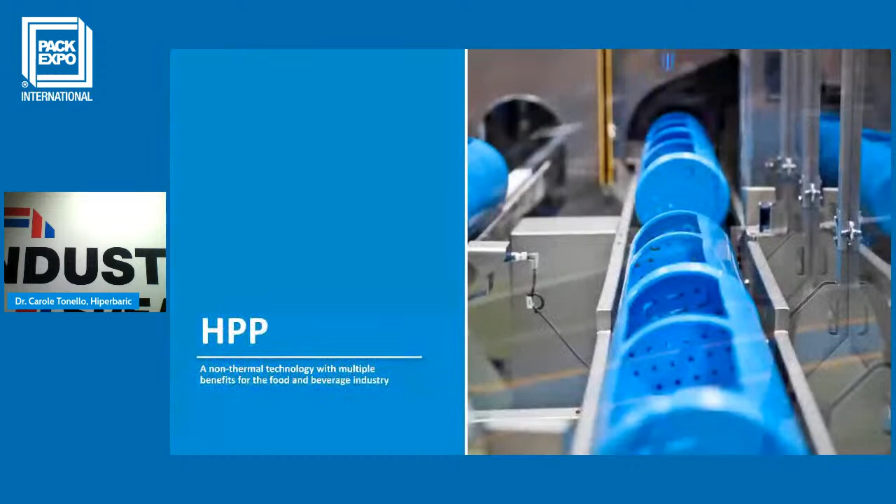First, I would like to introduce briefly my company. Hiperbaric is a Spanish company. We are the HPP world leader concerning machinery and high pressure processing equipment. The company has experience of over 20 years in the field, and we are based in Spain, where our machines are built. We have over 100 machines in the United States and 350 machines all over the world. This is really a global technology for premium products. How does HPP work?

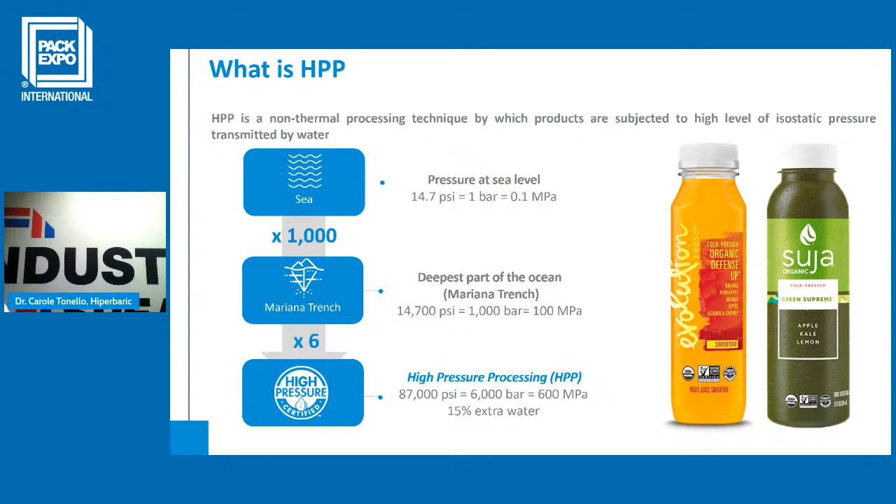Well, it's quite simple. It's like if you would place the products 60 kilometers below the water, so the pressure is 6,000 bar or 87,000 psi. This is what we can reach in the vessel, in the processing chamber of the machine. What is the interest? Well, we kill microorganisms. So we don't use heat, we use pressure. The heat increase is very low because the water and the food is not very compressible. The compressibility of water is 15% at 87,000 psi, so it's not so much.

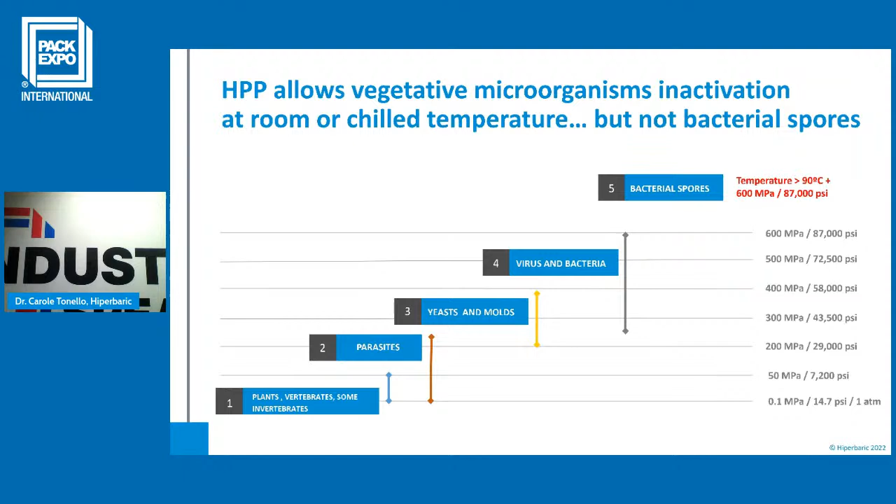We keep the products always under pressure, and always below room temperature. What are the advantages? We avoid heat treatments. We kill microorganisms, so we can reach between 3 to 5, 6 logs inactivation of pathogens. We multiply the shelf life from 3 times for ready-to-eat meals, for example, up to 30 times for juices. We can develop clean label products because we do not use heat, and you can remove chemical preservatives, reduce the salt, and have cleaner formulations.

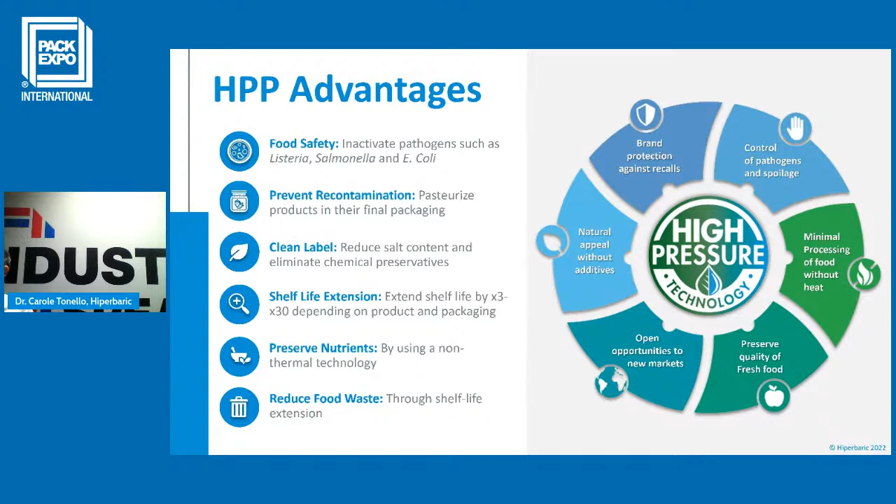This gives opportunity for enlarging the range where you can sell your products, you can export, and also you can ensure that the product is really safe for a long time. We know that there is more than 2,000 million kilos, so it's roughly 4,000 million pounds, processed under pressure each year.

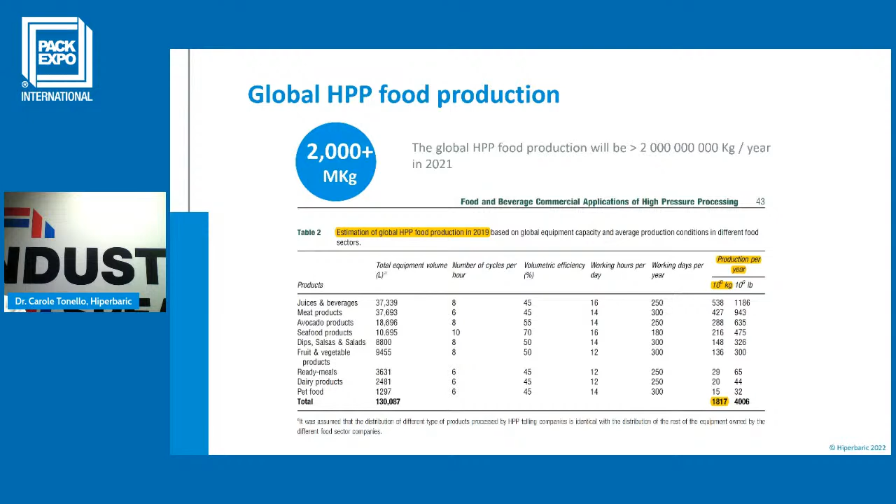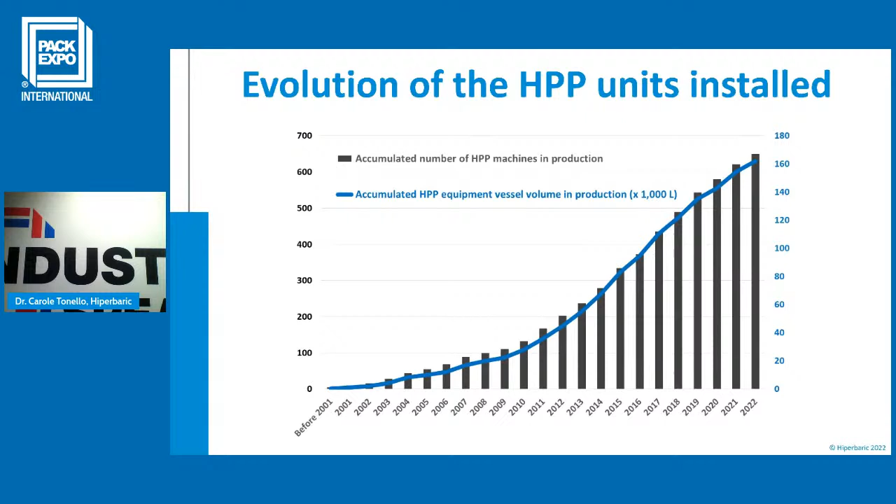This is the number of HPP units installed. As far as we know, there are more than 600 HPP units installed all over the world, and more than 100 are in the United States. This is a global technology. In North America, so United States, Canada, and Mexico, there's a bit less than half of the machines installed all over the world. This is because of food safety, and for Mexico, one of the main products processed under pressure is guacamole, avocado products. 24% of the machines are installed in Europe, and then there are some machines all over the world, as it is a growing market.

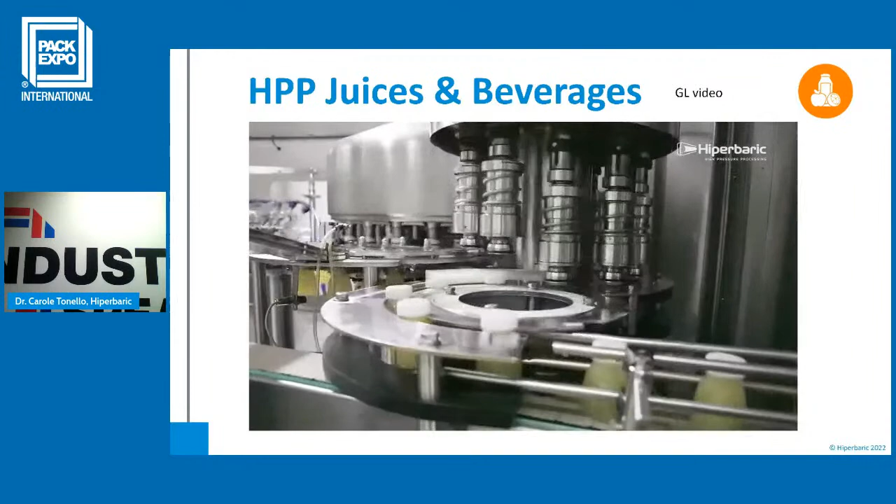A family, an 80-year-old family company. We are always driven by innovative, convenient, and natural products. So we wanted to have a long shelf life juice, but with the same flavor, with the same pricing. We were looking for technology, and we found this fantastic technology, which is HPP, high pressure process.

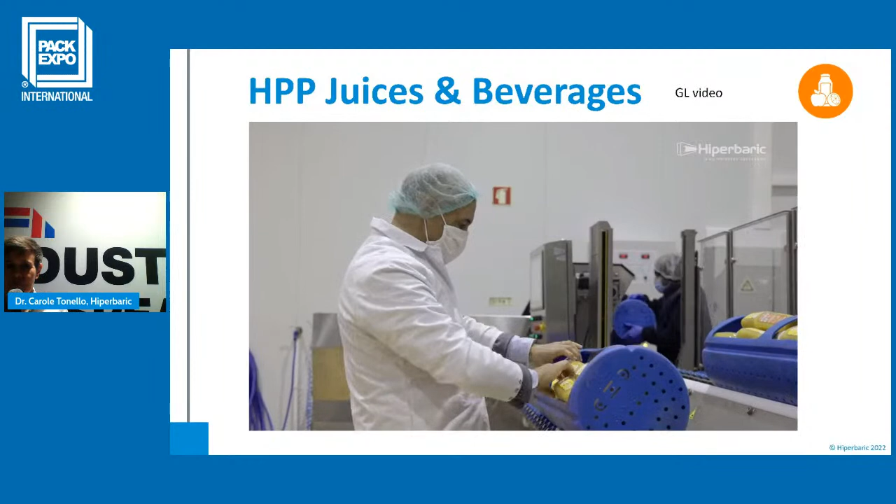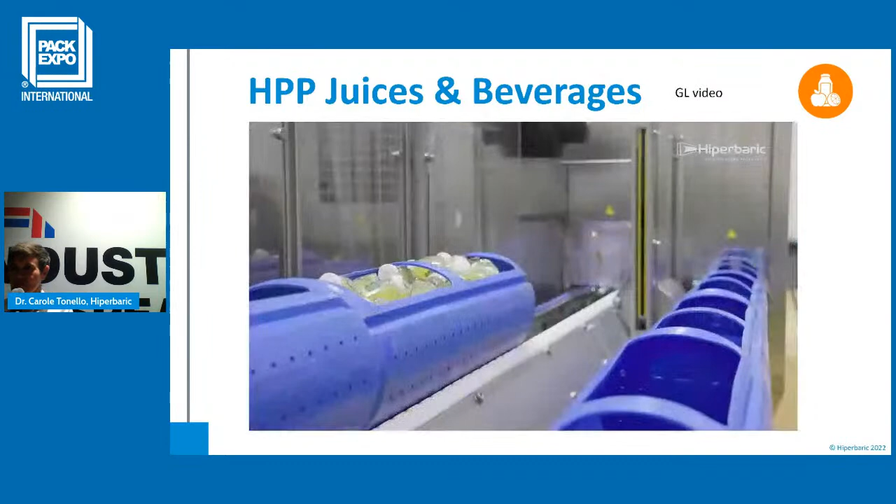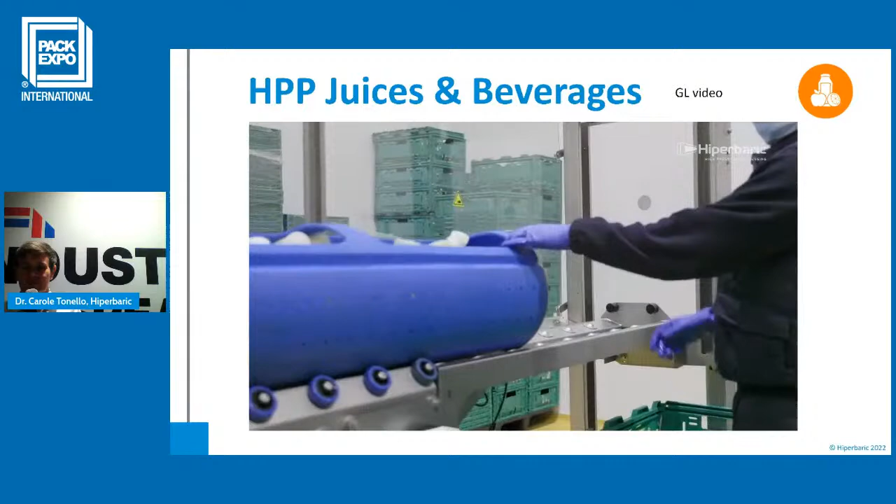And what we do is fill up the bottles with the juice. We close the bottles, put them in baskets, it goes into the machine, we increase the pressure, and this inactivates the pathogens inside. So it allows us to have a completely fresh product with the pathogens inactivated.

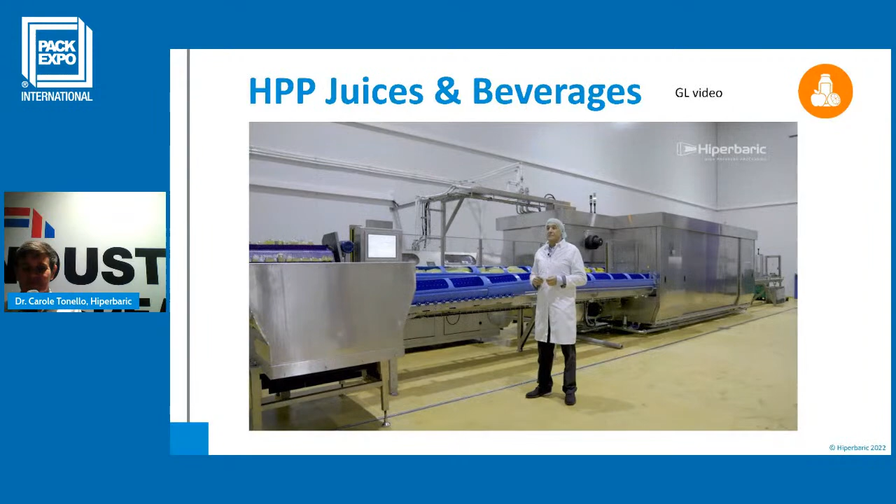Okay, that's it. So with high pressure in cold water, we get top quality products, clean label. So in simple words, we got fresher under pressure.

I have another video because I think videos are more interesting than what I can tell you. This is a customer called Freshcourt with Verfruco in Mexico, which is the main producer. Mexico is the country, the main producer of guacamole.

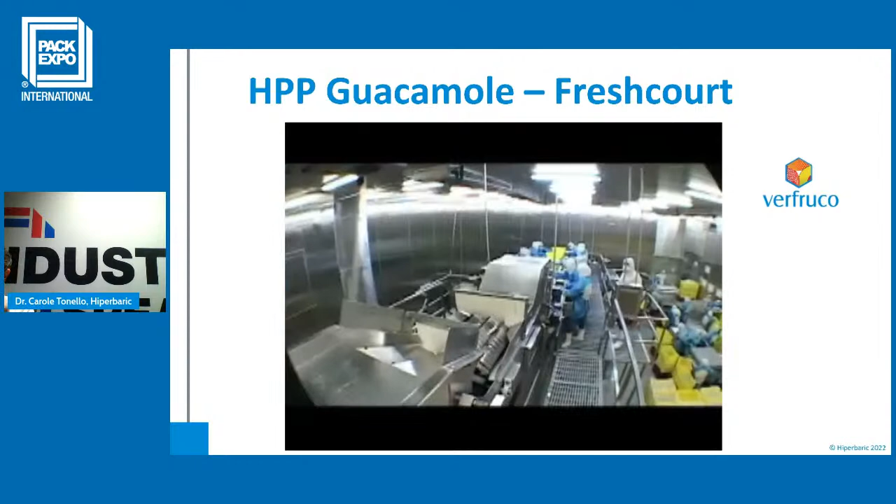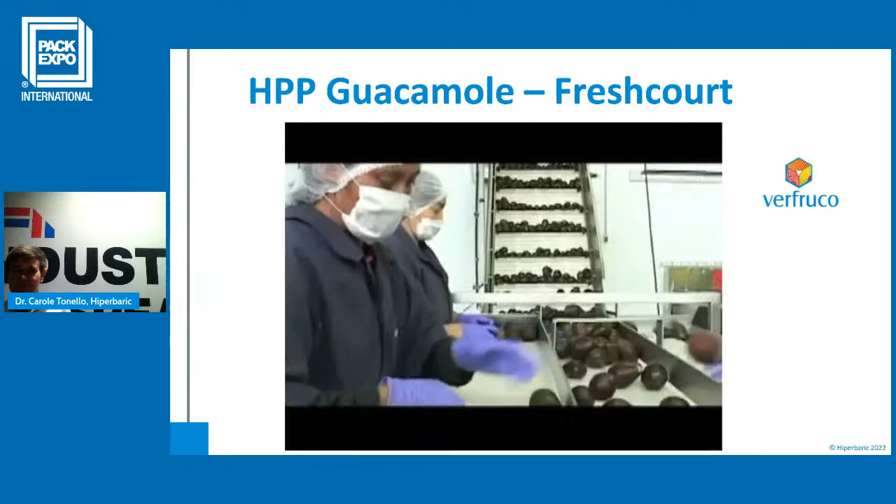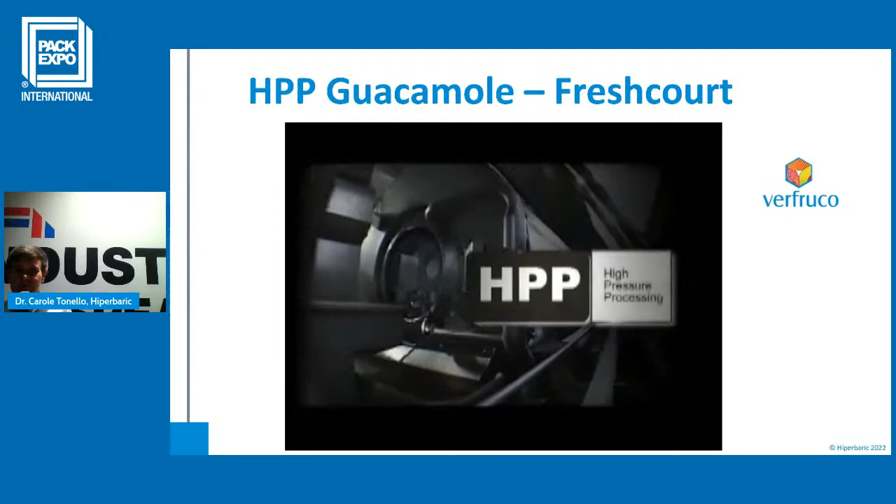This process allows us to deliver our products with the best flavor, texture, color, and ingredients.

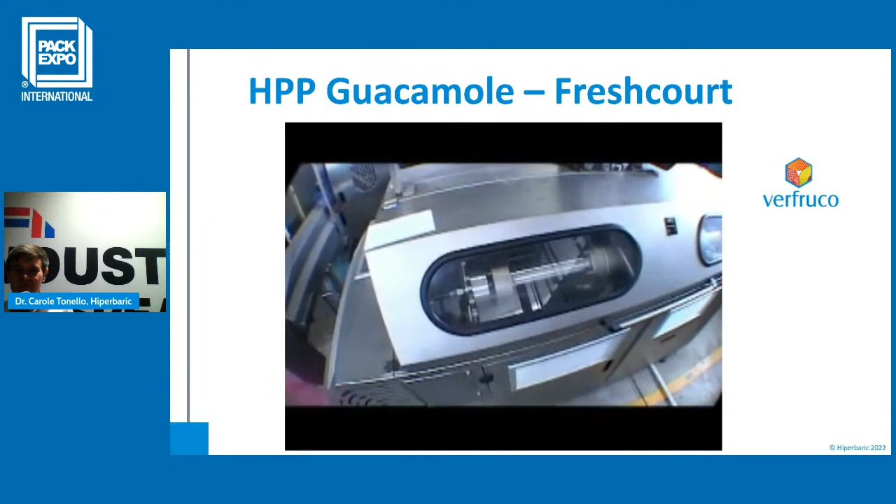In the case of guacamole or avocado paste, we go from, I would say, 2 days of shelf life and possibly a risk of contamination - because there is manual handling when you remove the meat from the fruit - up to 3 months shelf life. We also have another advantage: we partly inactivate the polyphenol oxidase, which is the enzyme that causes the browning of the fruit.

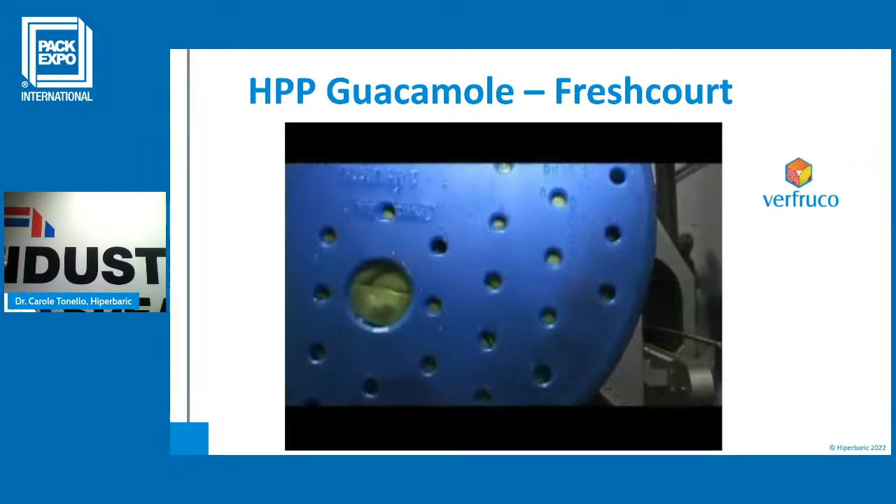Concerning meat products, we have a lot of applications in dry cured products like Serrano and Parma ham. This is typically a product you cannot process thermically, because when you cook it, it changes completely. HPP allows us to inactivate...

Listeria, especially Listeria and salmonella. We have some applications in raw marinated meats, but when the proteins go, we get a change of color and also a change of texture. So this is why this is more for minced meat and marinated meats. We also have a lot of uses in poultry products, like the poultry you place on top of a Caesar salad, and deli meats - because when you slice meat, you can contaminate each slice with the knife.

With HPP, you pack and then you process in the final packaging. So if there is any contamination with Listeria or other microorganisms, it's killed by the technology. We also have a lot of ready-made meats.

There is a quite new application which is pet food, because in this case the change of color for the animals is not very important. What they really like is the raw meat or raw meat mixture because it smells like meat, so it's important for the dog and the cat, and much healthier for them. If you have a pet, normally all their life they eat sterilized cans, so it's an over-processed product or dry product with quite reduced nutrient content.

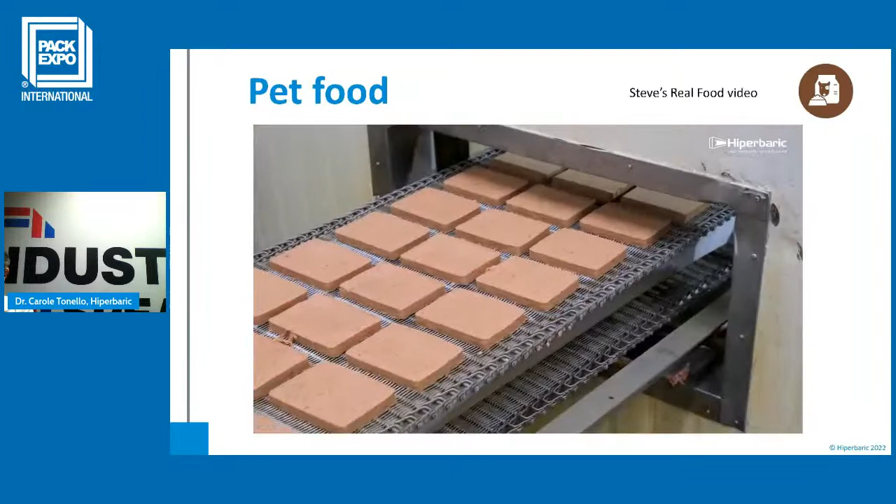Steve's uses HPP because we want to achieve a 5-log reduction. It is the only method that allows us to do so without compromising taste and nutritional value.

HPP is a craft more than a science. You have to get it right. If you do it right, you can achieve a 5-log reduction without compromising nutrition.

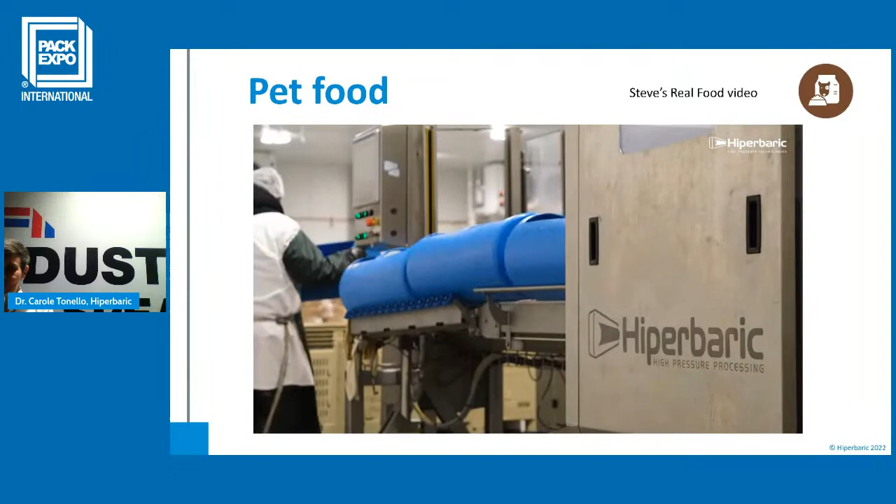There is another application, which is the shucking or the separation of the meat from the shell. The technology is also able to open the shell, like the mussel you can see.

The largest lobster company in Maine, a family-owned business since 1997 that focuses on one product: wild caught fresh lobster.

Lobster is so important to his way of life. Our lobsters are harvested by a dedicated fleet of lobster men and women, many of whom have been delivering their daily catch of lobsters from the waters of the bay for generations.

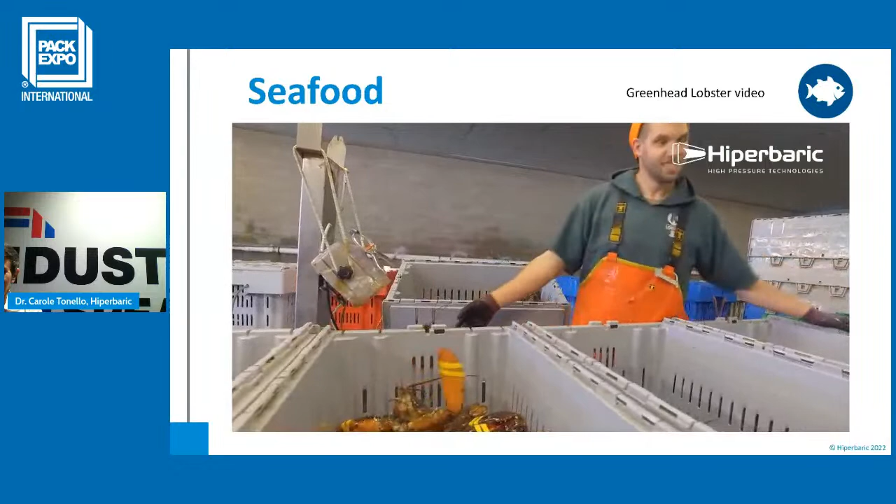Lobster has different stories. We are lucky to live where we live and have clean water, dramatic tides, and ideal temperatures for great tasting lobster. It's our mission to offer the highest quality lobster.

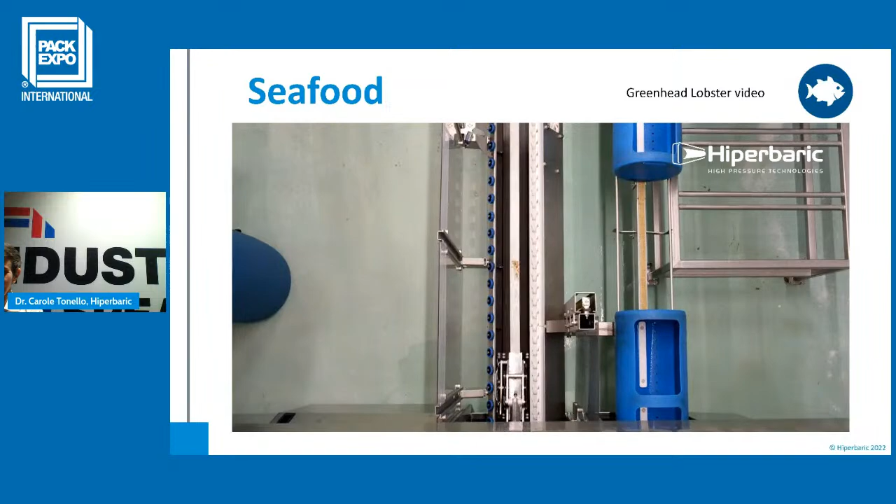Lobster technology has changed dramatically in the past 10 years. We've been at the forefront of innovation by implementing high pressure processing technology, the same technology used in other food processing. Using our state-of-the-art HPP facility, we can retain the same sweet flavor, texture, and taste of the lobster from the day it was harvested.

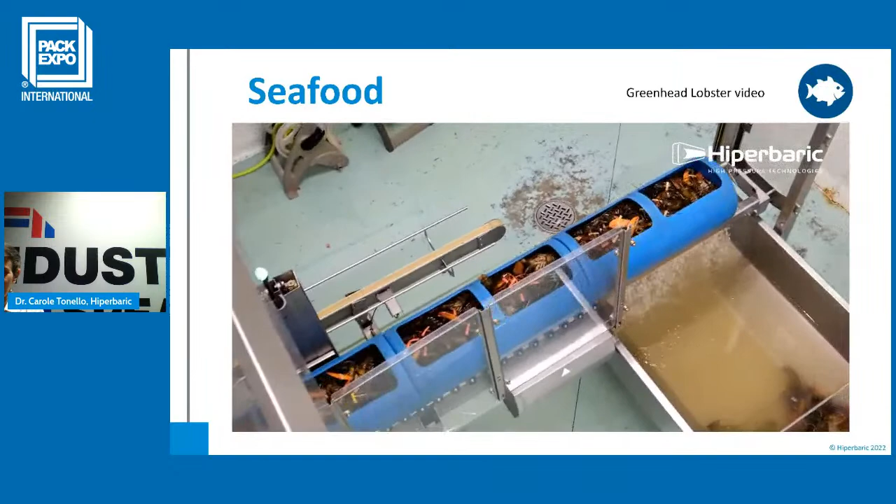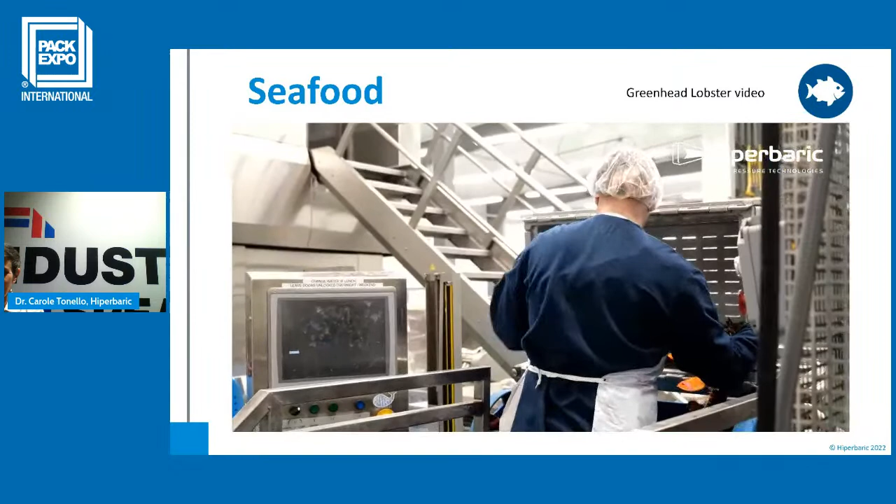HPP also allows us to separate 100% of the meat from the shell, increase the total meat yield of lobster by up to 80%, and ensure food safety by eliminating foodborne pathogens. The cold pressure technology also increases productivity and maximizes labor usage while offering tastier, premium quality with an extended shelf life.

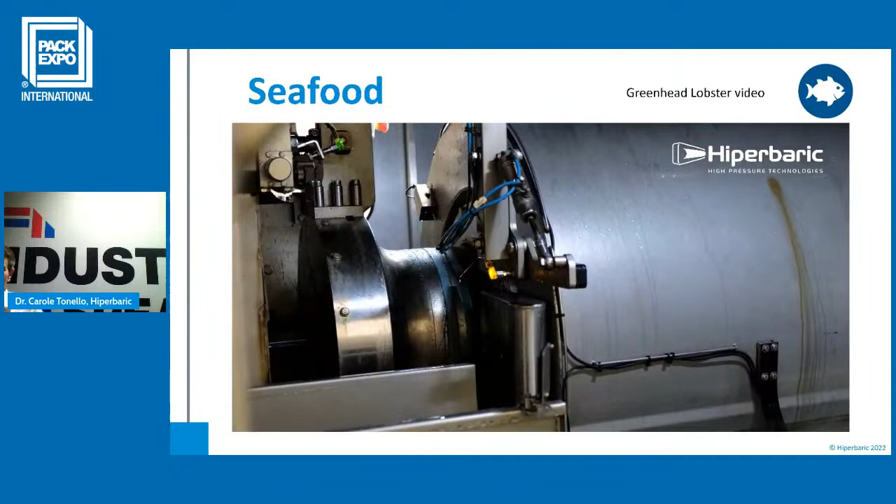So how does HPP work? HPP is a non-thermal technology that uses cold water and extreme high pressure, about 5 times more pressure than the deep ocean.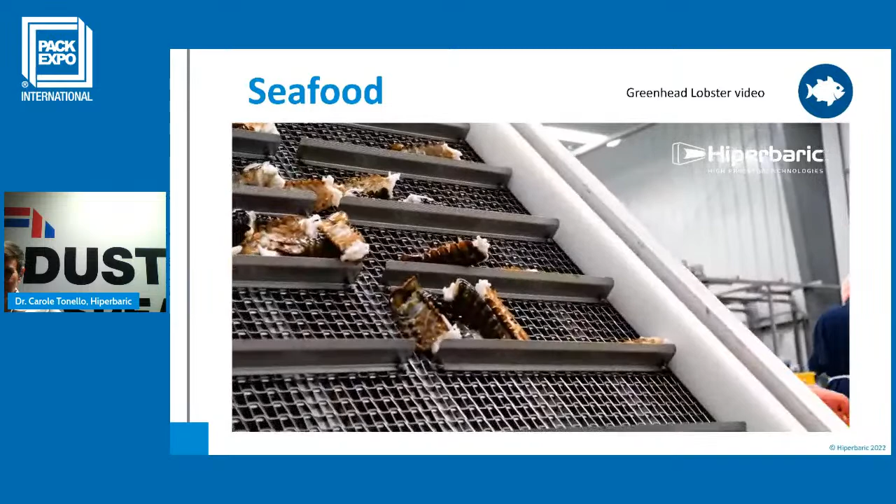This allows for a fresh, out-of-the-ocean, all-natural tasting experience. After the initial HPP, the lobster is divided into parts, often in tail portions with or without the shell.

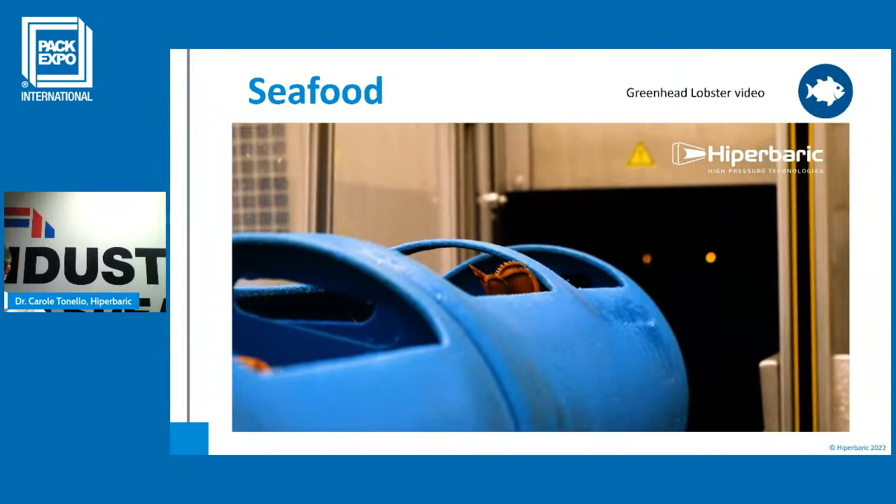We're unique in that our process line starts with Hiperbaric, which really defines the products: pre-cut lobster, raw frozen, and cooked lobster products. So Hiperbaric is an essential part of our business.

This customer in Maine has two applications. At roughly 35,000 psi, they can separate the meat from the shell. As you can see, they break the shell and remove the meat, and the meat doesn't change color, because it's only when we reach pressures over 50,000 psi that raw meat starts to change color. Then they have the other application: they cook the meat and send the cooked meat in pouches. So they do both applications with the same machine.

Ready-to-eat meals. This is an application not used much in the US, but quite a lot in Europe, because retailers sell sealed ready-to-eat meals rather than frozen ones. We also have a growth of new customers in India, because they have dark kitchens and can increase shelf life and deliver ready-to-eat meals over a longer distance.

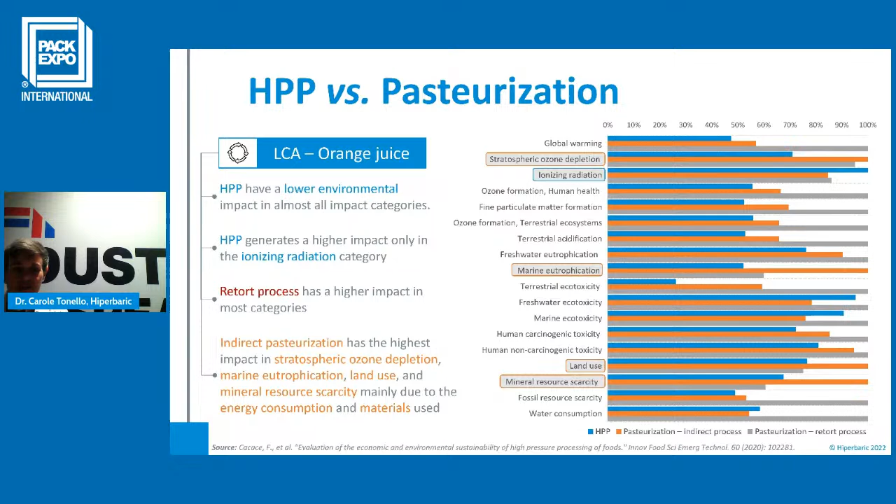There are other studies that have been done on HPP guacamole. Even though, on the one hand, we do not replace the classical cooking process - what we do is add another process - globally the results are equal in the life cycle analysis, because the shelf life is longer, so you have less waste. And that compensates for the extra energy you have to use for HPP.

So this technology has a ecological efficiency. It has been recognized in Europe.

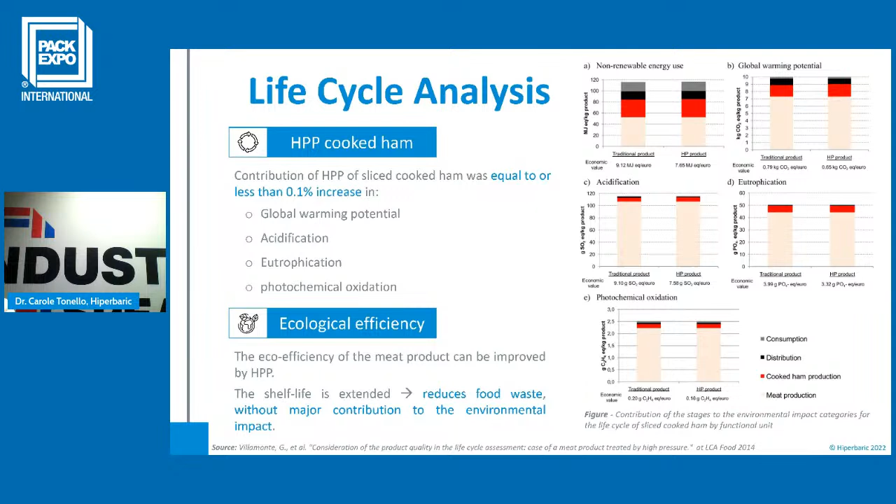For example, in France, they give a grant if you purchase an HPP machine because they know that you will reduce your energy consumption globally.

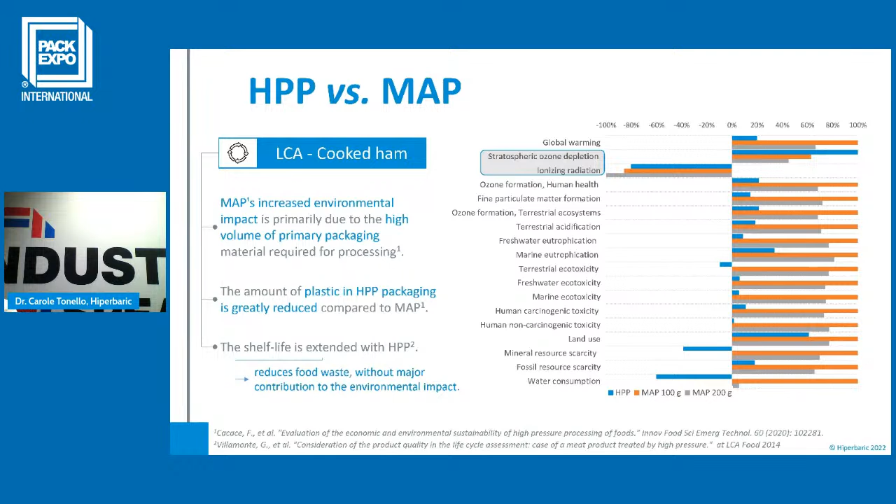If we compare with modified atmosphere packaging, HPP also largely reduces the impact compared to the same product with MAP. It can also be sustainable because it reduces water use and effluents. We recycle the water we use, and we generate less effluent than the thermal process.

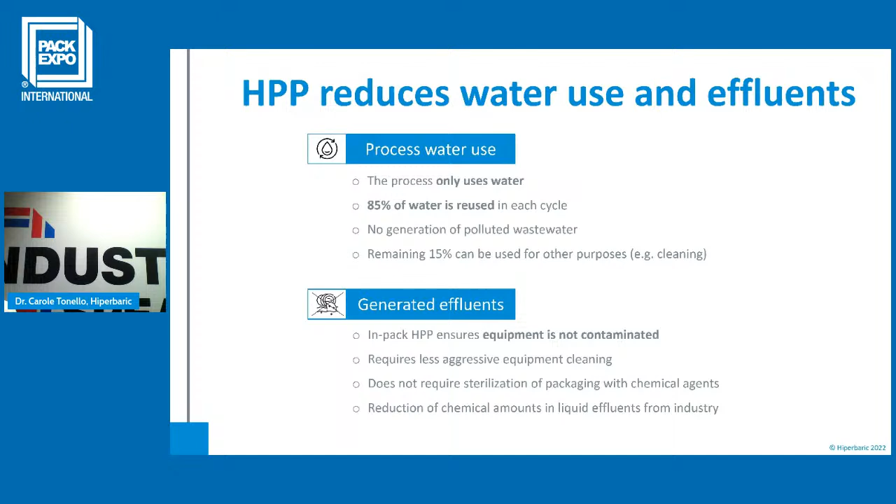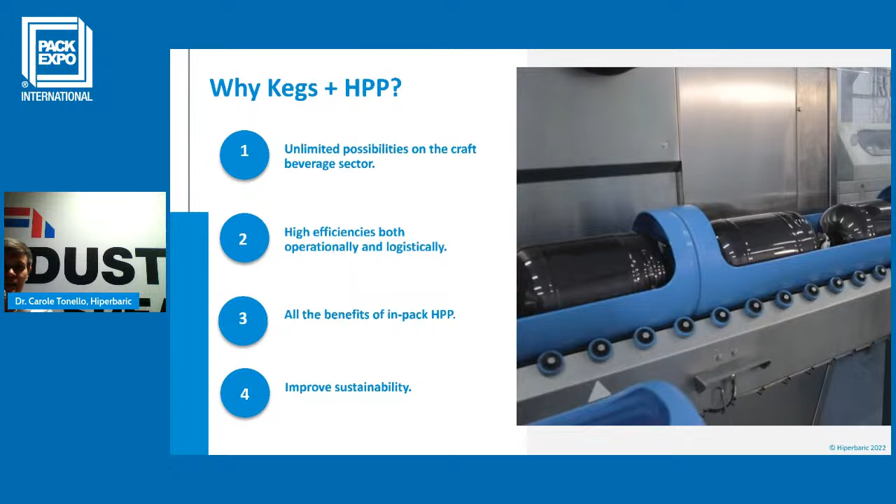For packaging, PET, EVOH, you can find easily in the market. We have worked with Petainer for the development of a plastic keg that allows processing of beverages, and this is also a sustainable option because then you can have unlimited possibilities for the craft beverage sector. This can go to bars, for example. It's highly efficient because we fill the vessel of the chamber highly, and you have all the benefits of HPP. There's much less plastic when you have bigger containers, like the keg.

In this case, 66% less plastic. So this would work for retail, for juice bars, and for cafes. Nourish Juice in the US was the first commercial application.

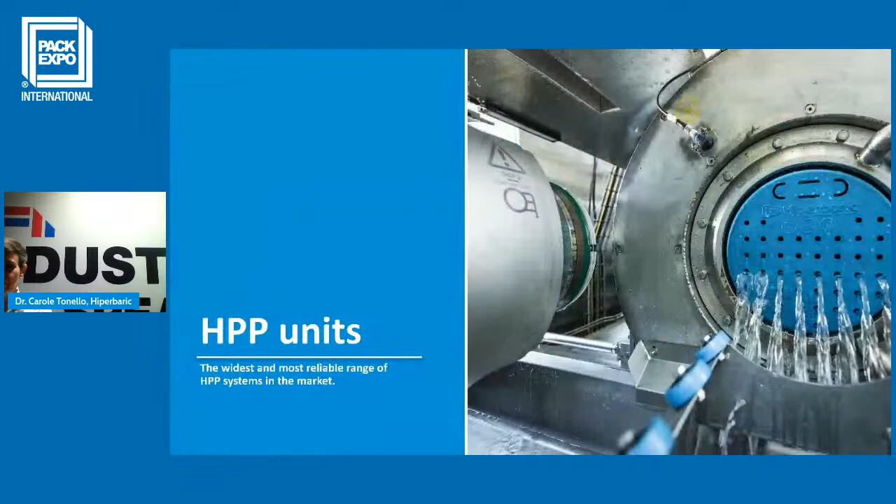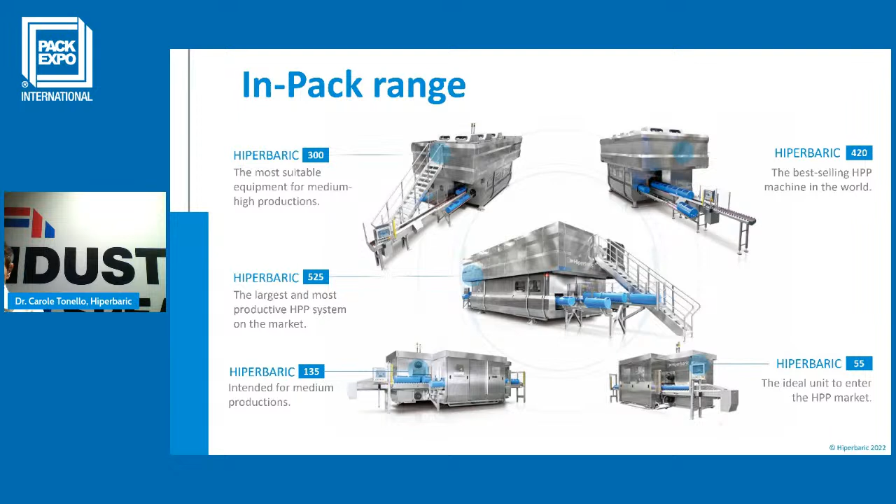Concerning the HPP unit, we have a large range of units. The five you can see here go from 500 pounds per hour up to 6,000 pounds per hour. And this is the In-Pack video.

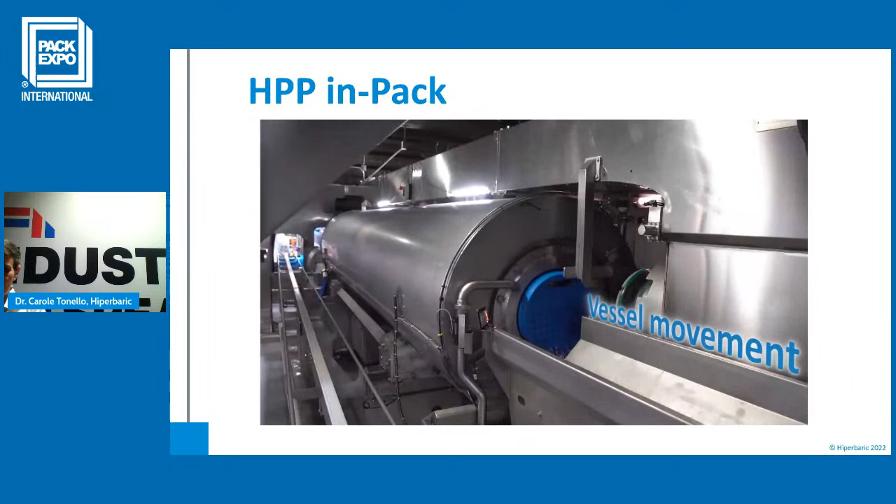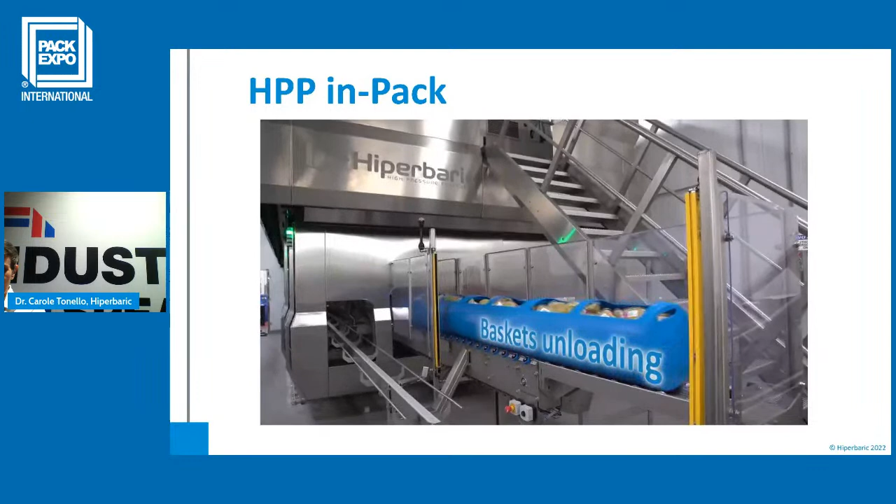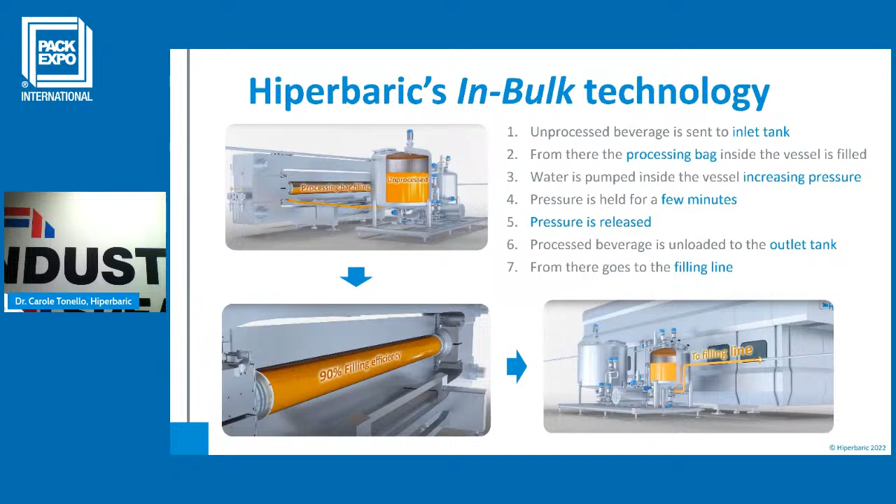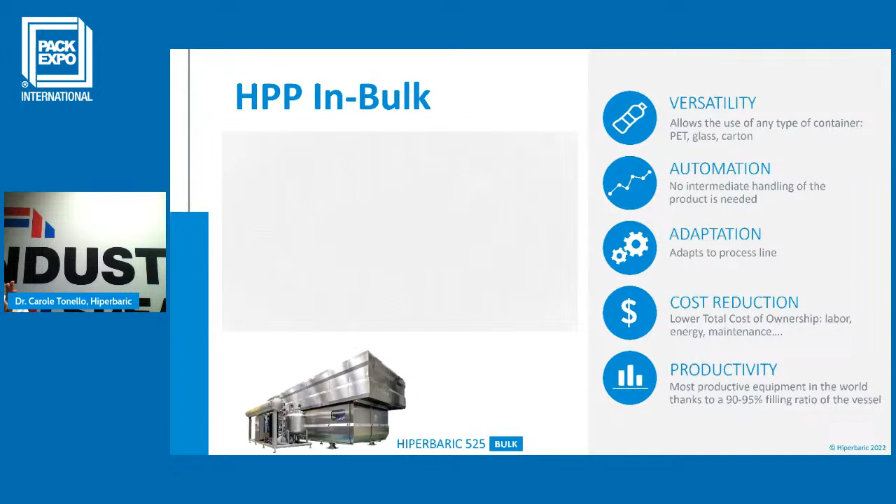So we have another technology to process liquids in bulk. What we do is fill a big bag inside the vessel, and the liquid goes through the plug. This is a patented plug that we can clean each time the juice goes in and the juice goes out. What are the advantages? We can use different types of packaging - carton, glass, whatever. It's fully automatic, can be connected to the line, and it generates a cost reduction.

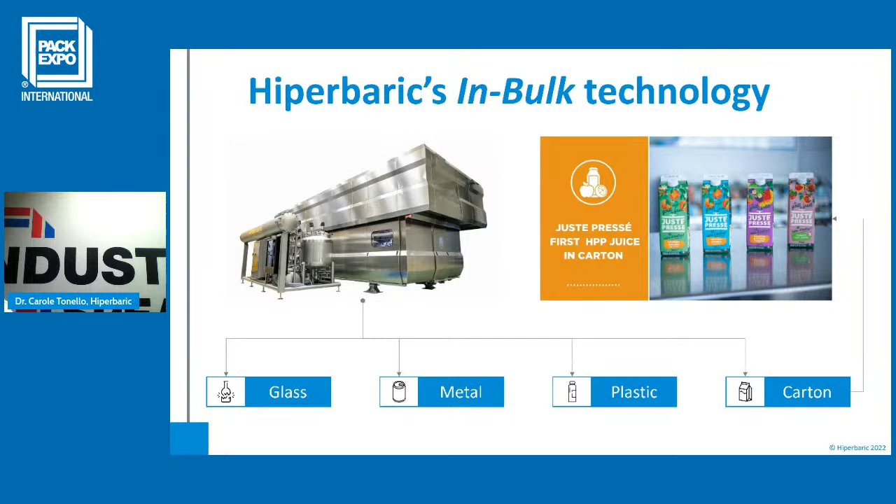It increases productivity. These are the first juices we're processing in France with this technology in carton, because if you want to place the carton directly in the In-Pack vessel, the carton will be damaged by the high pressure. In this case, we process the juice in bulk, and then we send it to the aseptic or extended shelf life line.

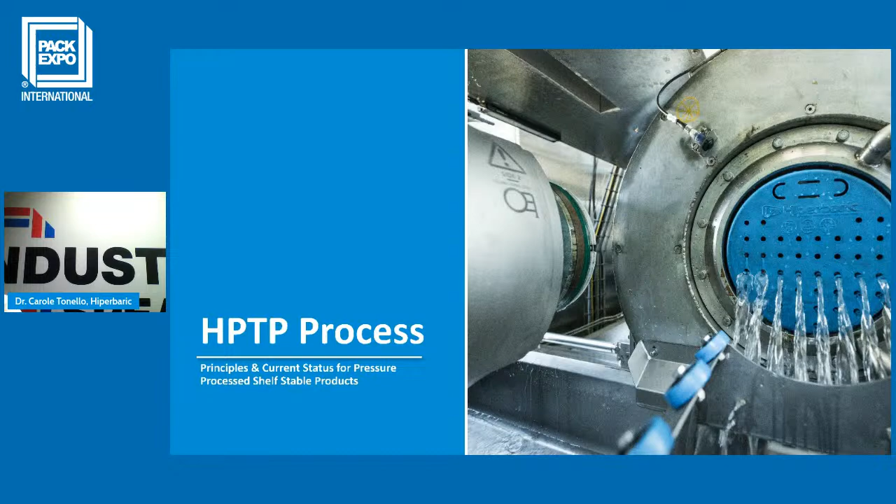In a few seconds, I want to talk about the future. This is not sure I have time, but this combines high pressure and high temperature to have shelf-stable products. I have no time to go on.

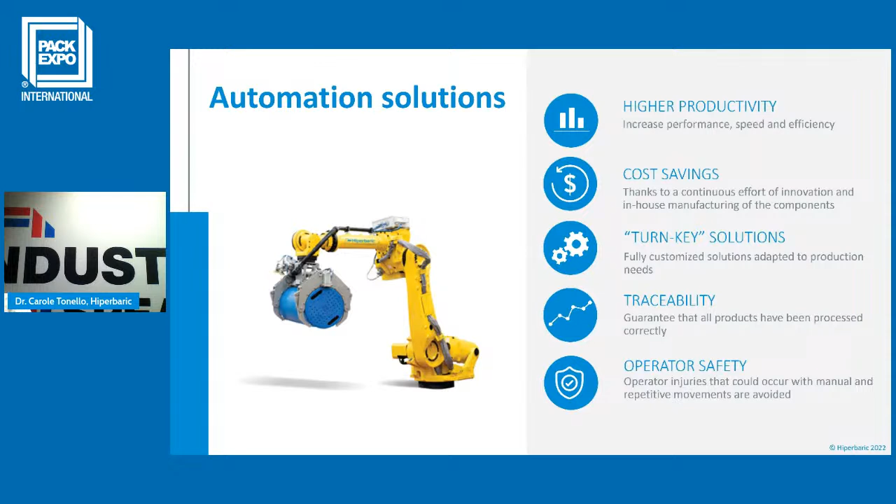I would like to show you - you've seen people loading and unloading the chamber manually, but we have a lot of automation solutions to handle the canister and the carrier. And that's going to be my last video.

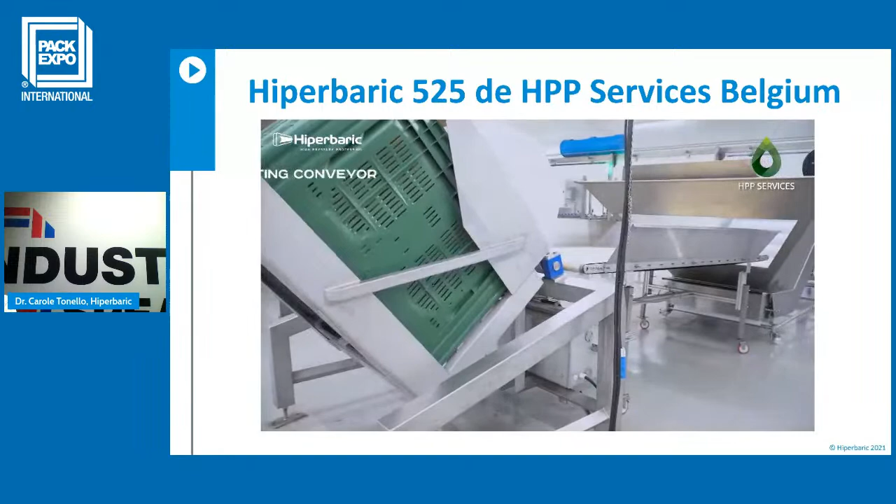This is a machine that can process roughly 5,000 pounds per hour, with just 1.5 operators - one on the machine and the other approaching the products and removing the products.

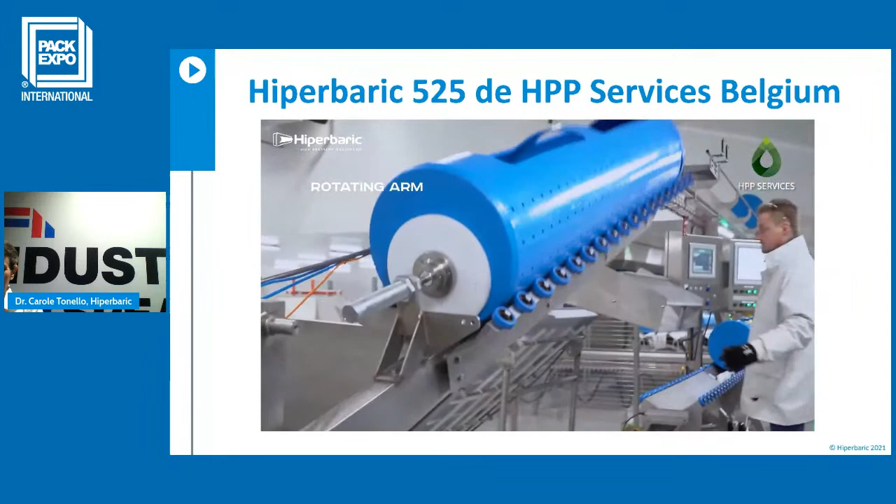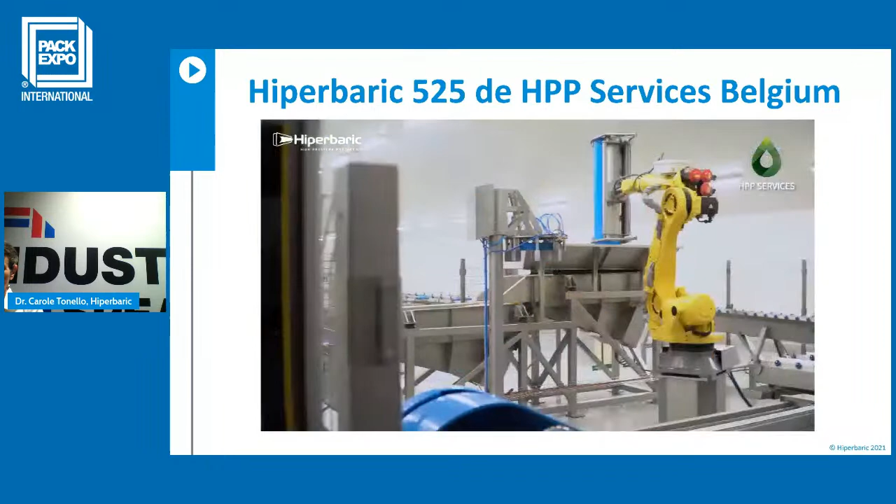This is really exciting automation. Nowadays, it's very difficult to find people to work in the food industry, and everybody wants automated lines. This was my last slide. Thank you very much for your attention.